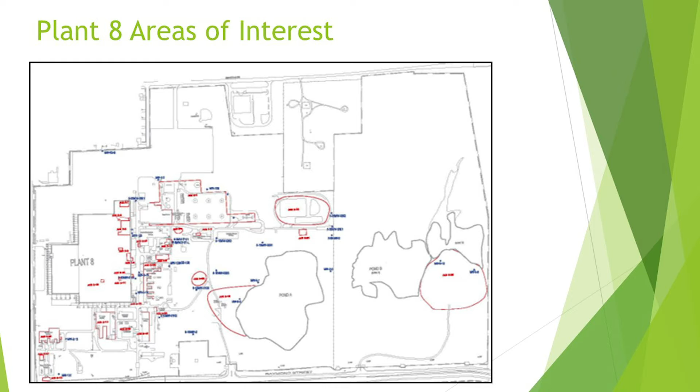This figure shows in red the areas studied at Plant 8. The areas with impacts were defined by collecting samples in a phased approach. If contamination was identified above EPA screening levels in any location, additional samples were collected in all directions until the measured contaminant levels in the samples were below screening levels. The green, blue, black, and purple labels on this figure show the locations where samples were collected during the initial investigation. 3 additional phases of study were performed to fully characterize the nature and extent of the releases identified.

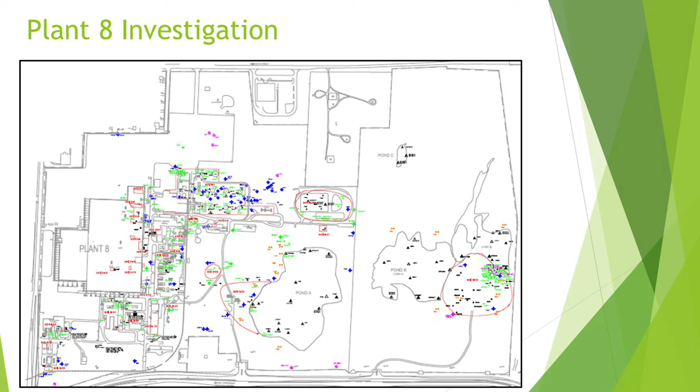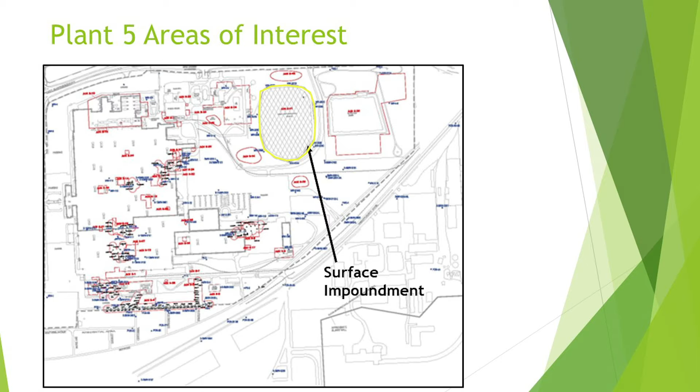In 2011, the Revitalizing Auto Communities Environmental Response, or RACER, Trust was formed to manage environmental assets from the General Motors bankruptcy. RACER Trust continues to be responsible for the post-closure maintenance of the surface impoundment. So for purposes of this cleanup project, the surface impoundment is not considered part of the Rolls-Royce site.

This figure shows the sample locations at Plant 5. Just like Plant 8, data was collected using a phased approach to define the full extent of the contamination. Also like Plant 8, the green, blue, black, and purple labels show the locations where samples were collected during the initial investigation.

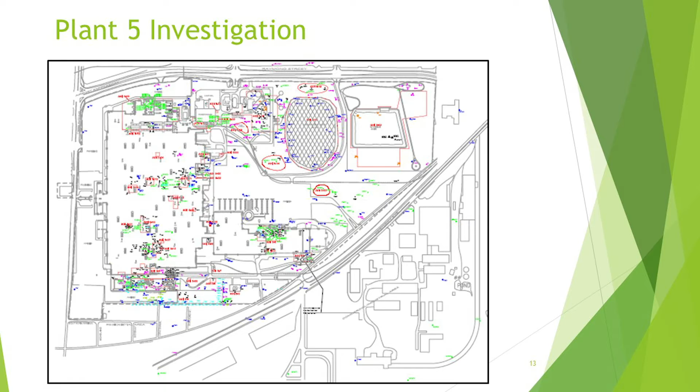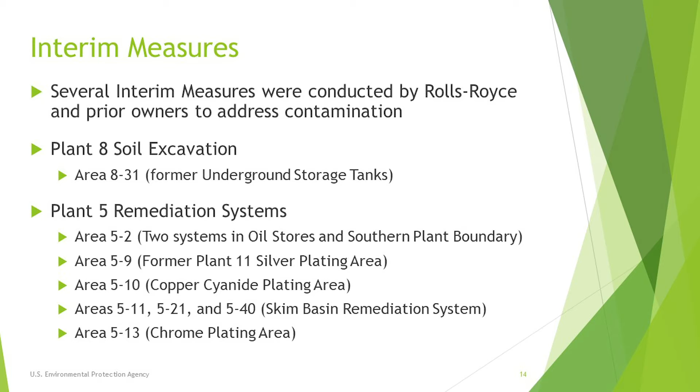Cleanup actions are sometimes conducted at facilities before the final remedy is approved to quickly address threats to human health and the environment that may pose a more immediate concern. These actions are called interim measures. Interim measures at the Rolls-Royce facility included soil excavation at Plant 8 and installation and operation of 6 remediation systems at Plant 5. The following slides will describe these activities in more detail.

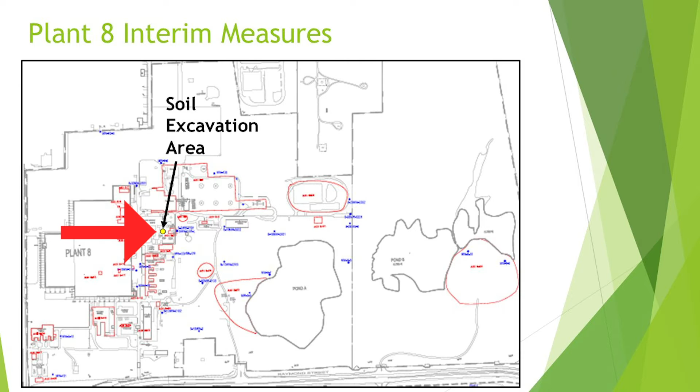The yellow circle on this figure shows the location of the interim measure that was completed in Area 8-31 at Plant 8. Soil in this area was excavated in 2 separate phases to address a release of mercury. A total of approximately 135 tons of soil were excavated and disposed at an off-site landfill. Confirmation samples collected after the second phase of excavation indicated levels of residual mercury in the soil were below EPA screening levels.

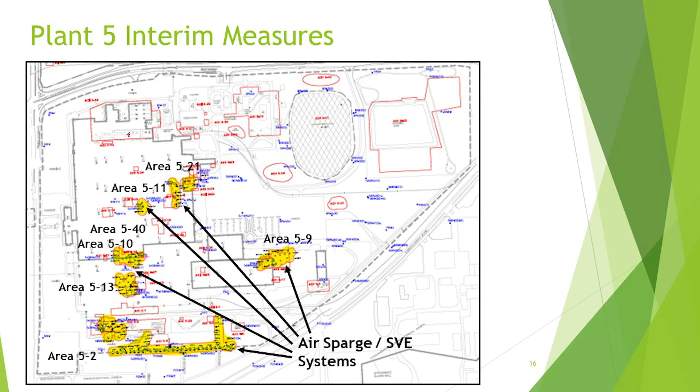Rolls-Royce also implemented interim measures for 7 areas at Plant 5, which are shown in yellow, to begin cleaning up the contamination while the facility developed the final remedy. An air sparge and soil vapor extraction system was installed and operated in each area to remove solvents and hydrocarbons from soil and groundwater. Additional sampling has confirmed that all the systems installed in these areas have met their goals to remove contamination and are no longer operating.

Vapors are the gases that form when chemicals evaporate. The vapors are removed from the ground by using a vacuum to pull the vapors out. Air sparging uses air to help remove contaminants from polluted soil and groundwater below the water table. The chemicals evaporate faster when air is pumped underground, making them easier to remove using a vacuum.

Certain chemicals, like the solvents and fuel found at the Rolls-Royce facility, evaporate easily, and SVE and air sparging work best on these types of chemicals. Air pollution control equipment collects the air and vapors that are pulled out of the ground with the vacuum. The harmful vapors are separated from the clean air, and the clean air is then released.

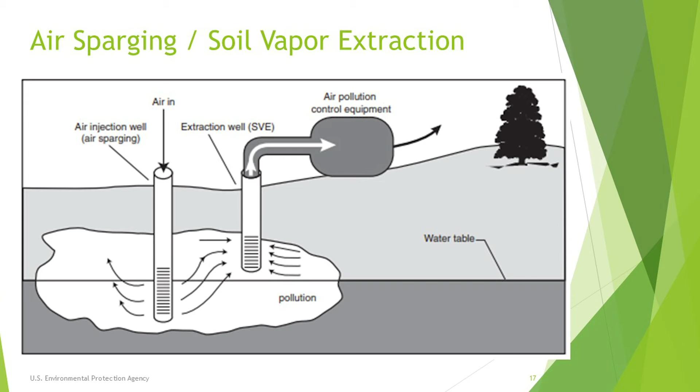Rolls-Royce developed a mathematical model which uses collected groundwater data to predict how the remaining contaminants will migrate in the future. They periodically compare the concentrations measured in the groundwater to the model to confirm it is accurately predicting contaminant movement at the facility.

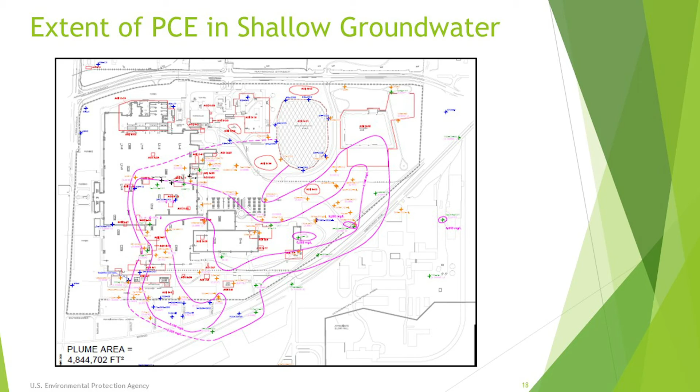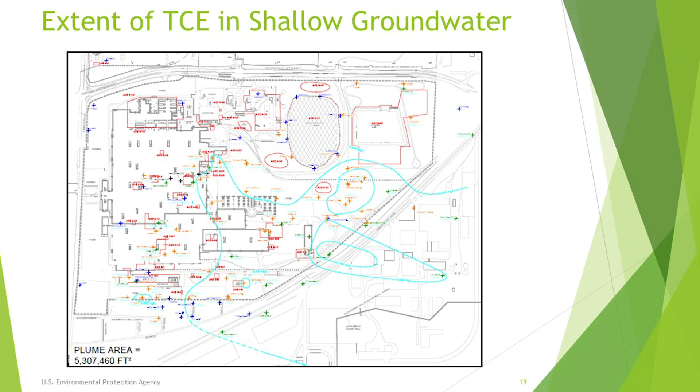This figure shows the current extent of TCE in groundwater at Plant 5. Like PCE, the concentrations are considerably lower than originally measured in many areas as a result of the interim measures conducted at the facility. TCE is migrating in groundwater off the site to the southeast. Rolls-Royce is monitoring the off-site concentrations of TCE by conducting ongoing sampling of the monitoring wells shown on the figure to the southeast of the facility. The groundwater model developed for the facility has accurately predicted this migration off the site.

Contaminant concentrations measured in soil and groundwater at the site were compared to EPA screening levels to evaluate whether they pose a potential risk. The screening levels consider possible human health effects and possible effects in the environment, such as impact to wildlife. When a sample is above a screening level, it doesn't necessarily mean that it's causing any harm or presenting a risk. It means that the collected data needs to move on to the next phase of study, which is called a risk assessment.

Risk assessments are used in many fields of study to determine the specific type and amount of risk in each scenario. The original RCRA facility investigation report included a baseline risk assessment that was later updated in 2010 and 2012 using new data. The Human Health Risk Assessment evaluated the health risk for people at or near the facility. It considered workers on and off the facility, possible trespassers at the facility, and residents living near the facility. EPA agreed with Rolls-Royce's conclusion that contaminants in soil and groundwater pose no significant human health risks for the current and planned future use of the facility.

A vapor intrusion risk assessment determined that nearby residents are not at risk of vapors from contaminated soil and groundwater migrating into indoor spaces. Additional sampling will be conducted in the residential neighborhood to monitor whether there are any changes in potential risk to residents. Rolls-Royce will also further evaluate the potential on-site risk from vapor intrusion.

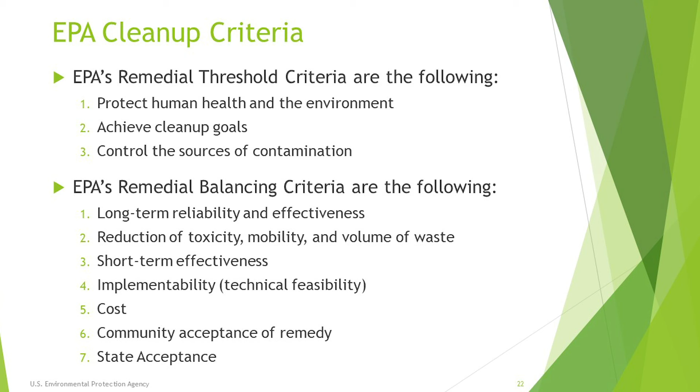EPA proposes implementing Alternative 2 at the facility since it best meets the evaluation criteria. This alternative would require Rolls-Royce to conduct groundwater monitoring to confirm contaminant concentrations do not pose a risk to human health or the environment. Rolls-Royce would also be required to conduct additional PFAS and vapor intrusion investigations. The existing no-well zone that prevents groundwater exposure would be maintained, and additional environmental restrictive covenants would be put in place. The remedy also includes flexibility to address any newly discovered contamination or identified concerns resulting from the PFAS and vapor intrusion investigations.

EPA will issue a final decision documenting the selected remedy after the public comment period on the statement of basis has ended. The final decision will include summary responses to public comments received on the statement of basis. The selected remedy will be put in place after EPA issues the final decision and response to comments document. The document will be added to the facility website and administrative record. This concludes the technical portion of our presentation, and I will now hand the presentation back to Ruth.